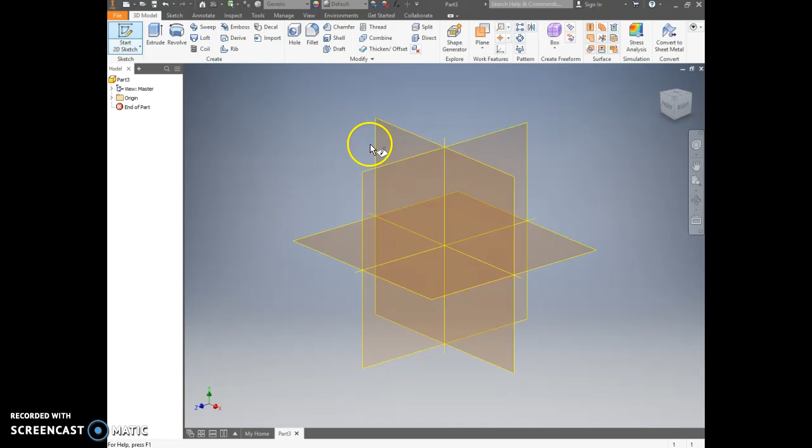The next part I'll be making is part 7, the linkage arm. So I'm first going to draw these two circles. It says that this circle has a radius of 0.1875 and they're 3.5 inches apart. So I'm going to start a sketch, click a plane, do a circle.

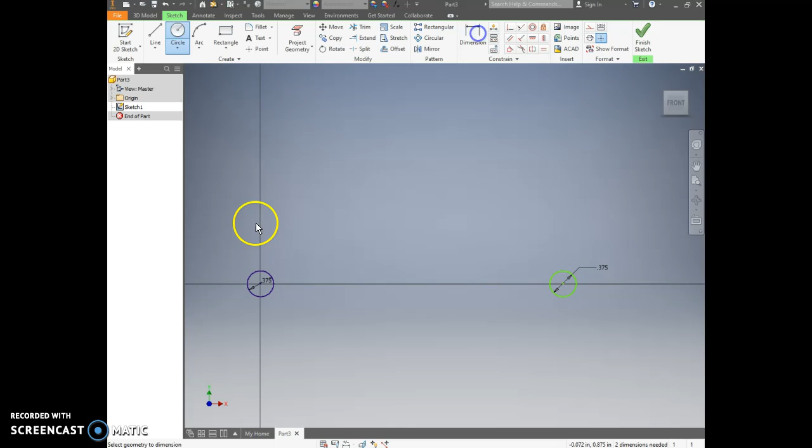It said the radius was 0.1875, so I'm going to multiply that by 2 since I'm getting the diameter. I'm going to go ahead and do another circle over here that's also going to be the same measurement. Okay. Now that we have those circles, I'm going to dimension between them from the center of that one to the center of that one, which should be 3.5.

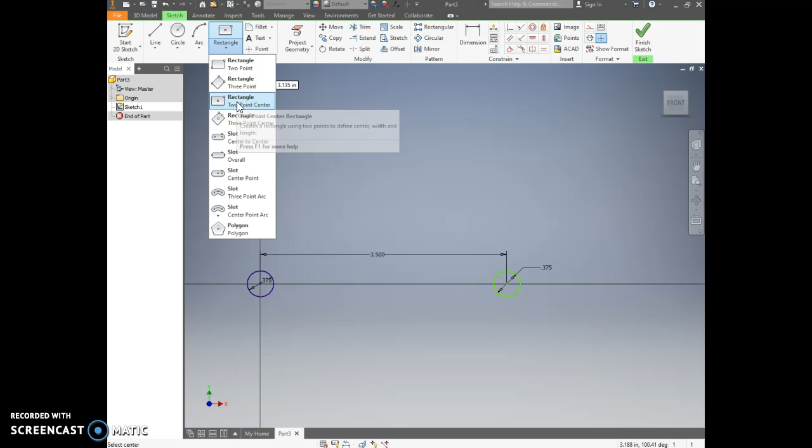Then I'm going to do a rectangle that's going to go, if you look, the rectangle goes from this circle all the way over to this one. I'm going to do, I guess I'll just do this 2-point rectangle.

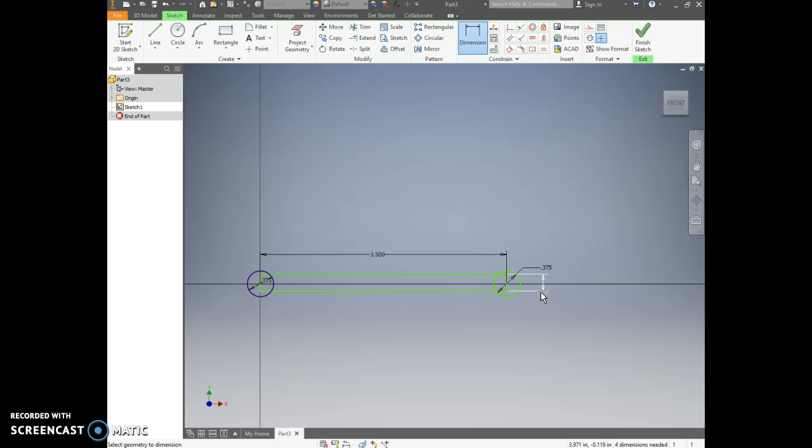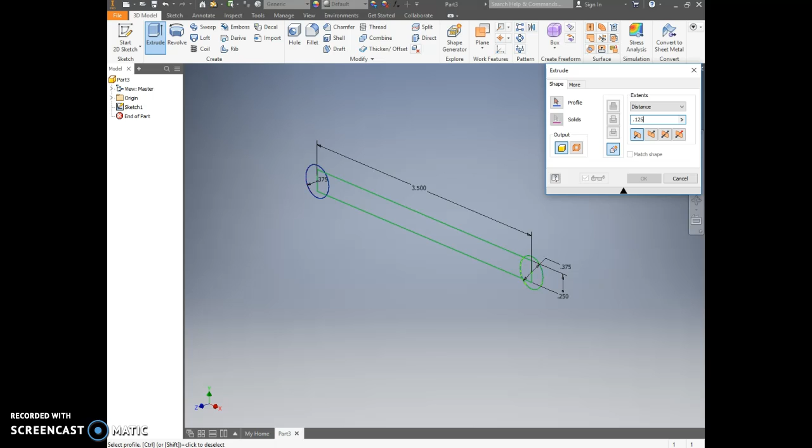Okay. Then if I look at that circle, it's 0.25, or the rectangle is 0.25 tall. Okay. Then I'm going to extrude it 0.125. I'm just going to click everything I drew, hit OK,

and then it looks like there are actually 0.125 circles through the center of both of the other circles. So I'm going to start a new sketch on here. I'm going to do a point in the center of that circle and a point in the center of that circle.

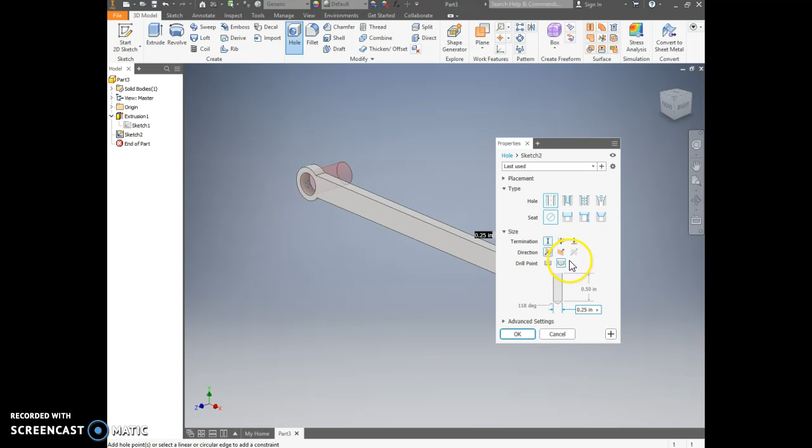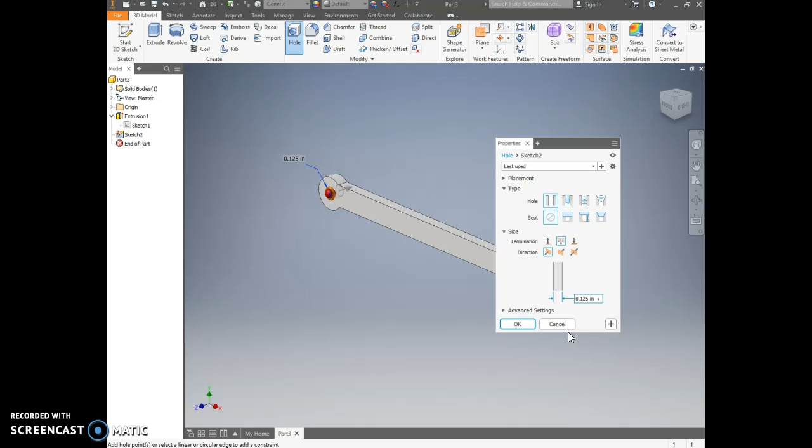And do a hole. It says the hole's just straight through, all the way through. And it says it's 0.125. So I'm going to go point .125. It missed that one, so let's see. I'll get my sketch back.

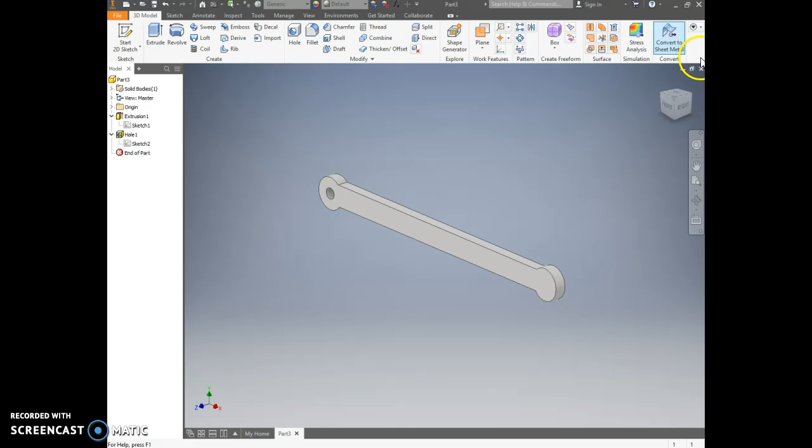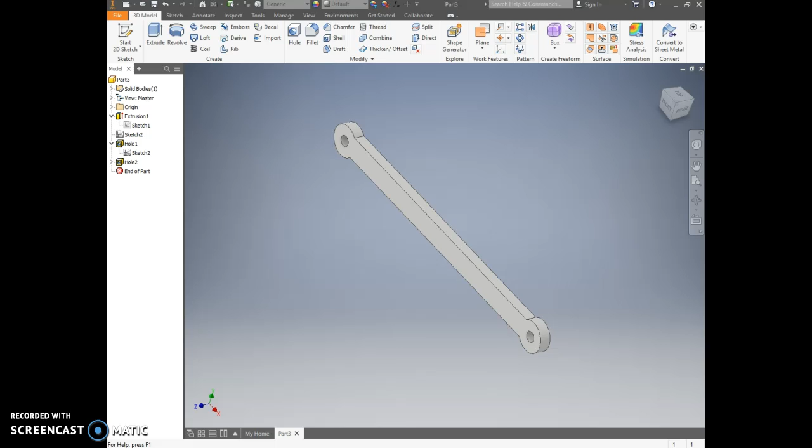I'm going to turn that sketch on and grab this last hole. And then hit OK. So that is part 7, linkage arm, so go ahead and save that.

I am not going to be doing part 3, the hitch magnet. That's just a couple circles. It tells you their diameter, and you're just going to extrude in between the two circles, so I think y'all can handle that.